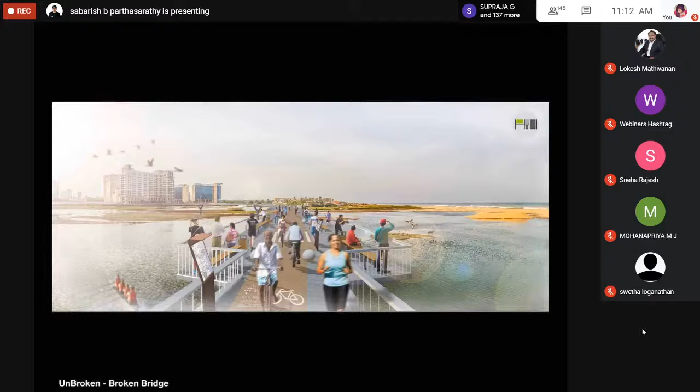And the same spot with the night view.

This is again the super specialty hospital and its public plaza, for what it was intended to be a public plaza, but I don't think it's serving that purpose yet. So what it could be - we were just trying simple notions, making those staircases seatable, connecting a simple bridge, and having the public plaza host a central area of commercial use or any format to activate the space. That was our only intention.

Chennai itself lacks a lot of urban spaces in comparison to other cities. Moving on, and definitely yes, we got a lot of media attention.

So this was just a thought process of what these spaces could be, and what if we accelerate this whole thought process into the future - picking up images and thinking what could it be. That was the whole idea - accelerate it through time, let's say travel 30 to 40 years across.

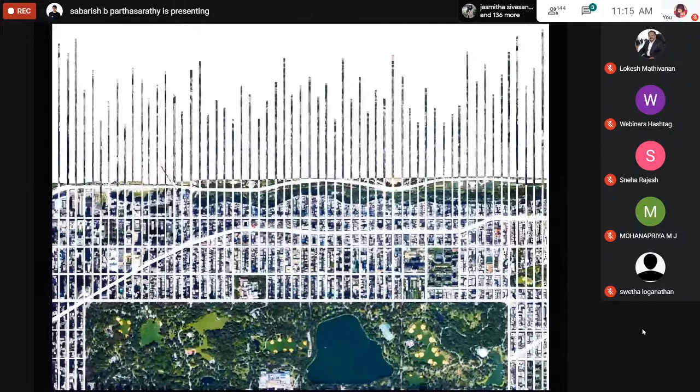And Manhattan, being a completely gridded city, has a complete gridlocked pattern. So zooming in a little into scale - what if these city blocks, what would they convert to be? A capitalistic notion, a city like New York - how would they react? Will they build buildings on the streets, or organically connect them with green spaces? We were just testing images, a short exercise of seeing what these city blocks could turn out to be.

This is another part of the city block. This image is at Central Park - the bottom corner is the entrance to the park, and the top is a complete billionaire row area. What if billionaire row builds buildings onto the streets, and the park explodes and rolls out into the streets as well? What could be the reaction to this kind of scenario?

This is one of the streets in Soho. The history behind the street is that a canal originally ran through it, and they had to bury the canal - it's no longer there. What if we reopen the canal and have a nice urban spot in the city?

Then coming to Times Square, a very heavily populated area - what if that also has a built reaction to it? Most of you must be familiar with the building morphing I've been doing onto these images, but these are just quick notions to test and see what the reactions could be.

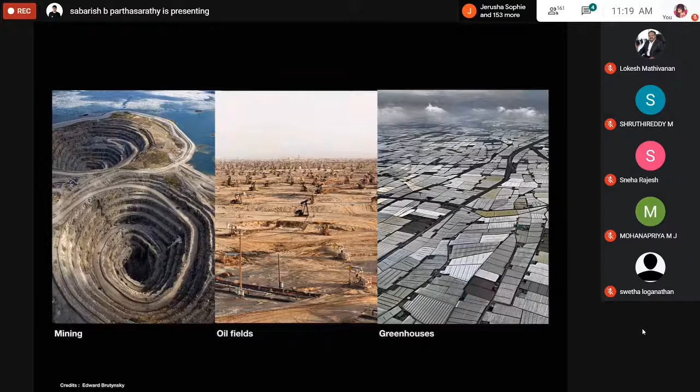We mine so much area on the Earth's surface. There is so much explosion of oil fields. And on the right-hand side, you're seeing greenhouses, complete plastic wrapped greenhouse structures in Spain, and salt pans. The left image is from Utah and the right image from Rann of Kutch, India. So how infrastructure changes the whole face of the earth, like how there's been poisoning of water bodies from chemical industries, or the Pallikaranai marshland, for example, such a large area just because of human intervention, completely changed into something else. On a very larger scale, not just Pallikaranai marshland, but something on a very larger scale. So that is what Anthropocene is.

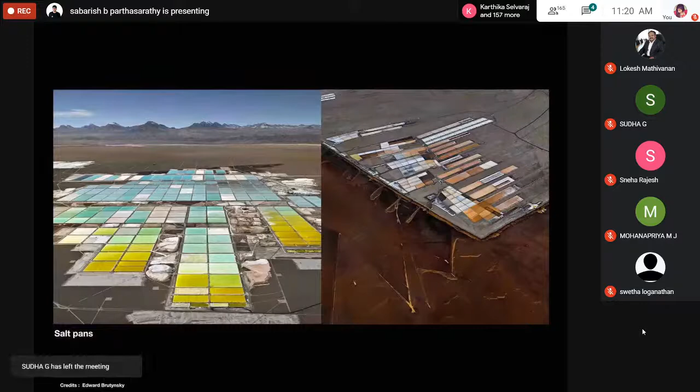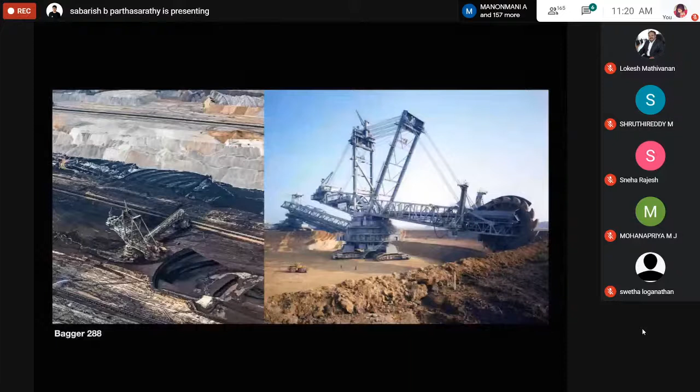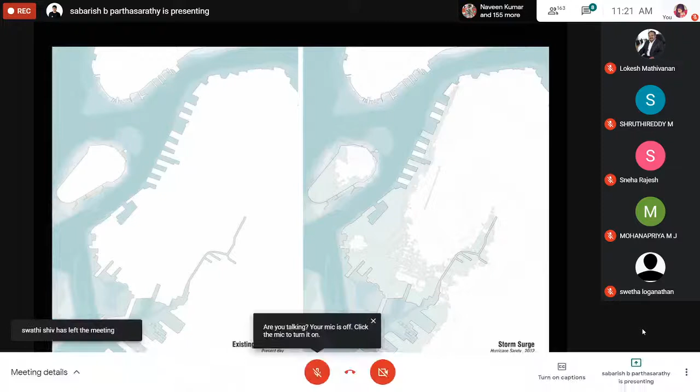So the existing coastline on the left is what it is now, but during Hurricane Sandy, there was a storm surge, and a very big portion of Brooklyn was completely flooded. This was 10 times larger than the Chennai floods in comparison, because this is one of the largest floods even New York has seen so far in history. This completely halted the whole system of infrastructure, from electricity to transit to everything. It was completely devastated, and it took a lot of time for them to recover from this.

So the small canal you're seeing is called the Gowanus Canal, and then the complete portion that is submerged, I'm talking about the right image, the Gowanus Canal, and the submerged portion is Red Hook. So what if, relating to our Anthropocenic scenario, what if this area becomes an unlivable condition for the future? I'm already setting the scenario probably, say, 70 years from now, or 80 years from now. So what could be the usability of this land? What could we do with this land?

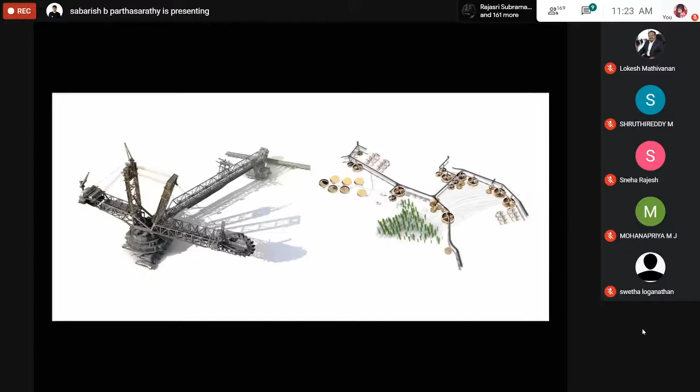So what if infrastructure comes into play into the city, which plugs in with part of the city? So what we did is I picked up the Bagger 288, and what you're seeing, a graphical image on the right, is algae farms. So the landform degrades, and it becomes more like a marshy land area, and Red Hook sort of just goes under the water, let's say. So how these infrastructures could amorphically change the landscape of that area.

And what if the other side, the Gowanus Canal part of it, becomes this acidic landscape of algae, and how those algae could be converted into biofuel. It's a simple infrastructure which sort of just scaled up in a large area. So these are more images of the model.

The green pipes that you're seeing are algae towers that converted into biofuel. As an objectified sense, we were looking at this proposal more at an artistic and aesthetical level. We were just coming up with a simple idea of a model and a few images along with it, how it could look.

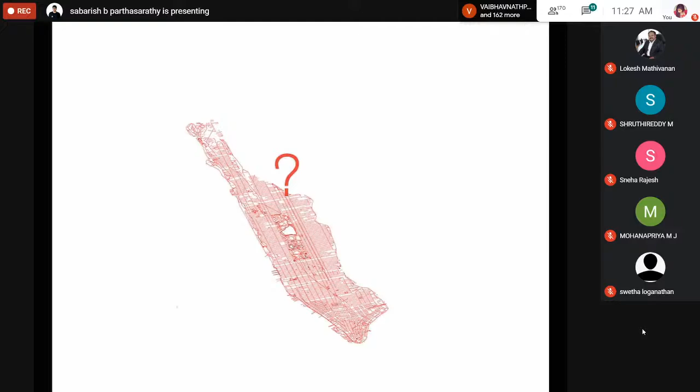So what could be- we have a new blank canvas, and what could the space be used for? Let's just stay there at the moment.

America, in its own culture, shopping or these big box shopping centers have always been part of their culture. Any store for that matter, apart from very small scale retail- of course those are there all through Manhattan- but a majority of users sort of divert towards these big box stores. In a lot of sense, people from a low income group to middle income group, anybody directs towards these big box stores, and these big box stores have been the key drivers of the shopping industry.

This is an infrastructural piece. Something of this scale should really be treated as infrastructure, where a group of these big box stores sort of become malls, and those are the malls that they call themselves big. For them, malls are not on a human scale, in my opinion.

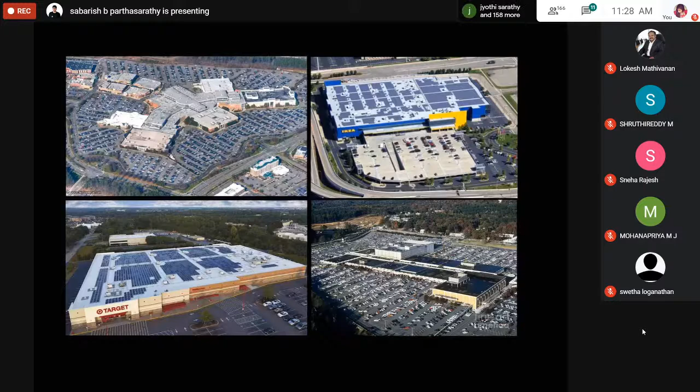Our premise was: what would these malls function like? How would people access these malls when we take the cars off the street? Because the majority of malls are located outside Manhattan Island, so how would people access this? What if we just push this question forward and see what kind of solutions we would find?

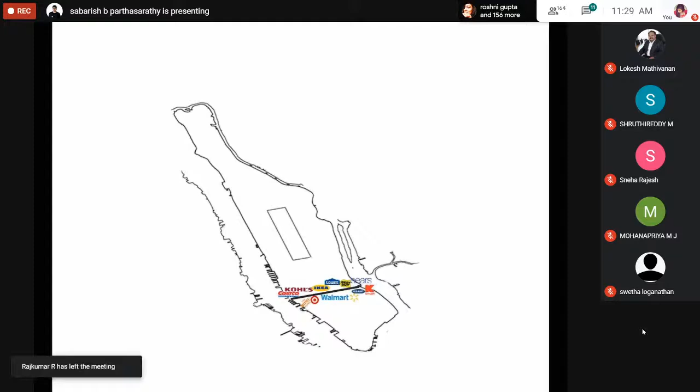So I picked up a street around a residential area, and what if we just bring all these stores into the street, and how would people use the building? What I was looking at is a crazy idea, but definitely could be possible considering the current times we are living in.

So in the future, what if we just drop a 3-kilometer long building, which is 7 meters in width, in the middle of the street, and how this could function as these big box stores for the residential area around?

What we're going to see right now is, as I told you, on the longer direction they split into avenues. We're just going to cut sections across each avenue and see what could be the aesthetical quality, and how the building reacts with the urban connection to the street.

In the first avenue, as I told you, what if it's flooded at the bottom, and this is how the perspective could be.

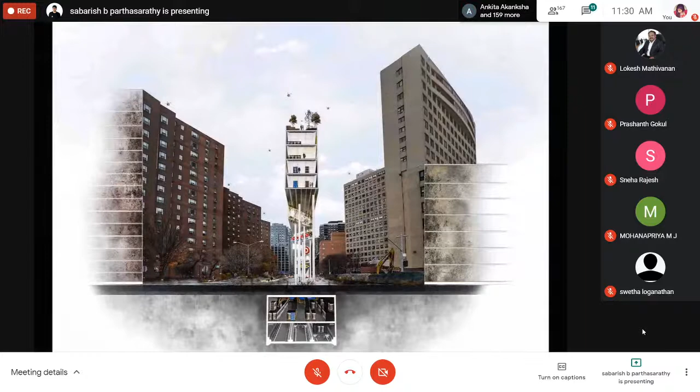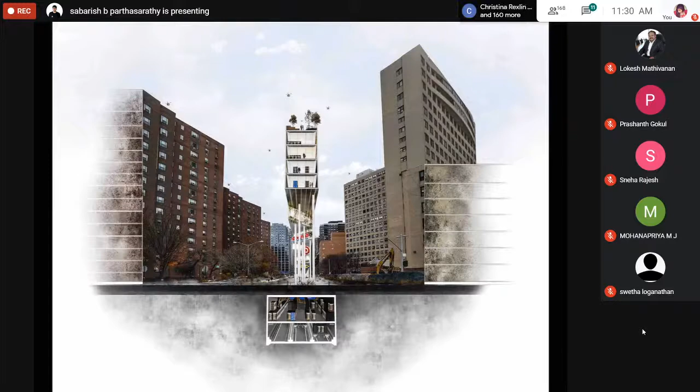To logically aid the building, we actually have a robotic transport system at the bottom that connects to the other parts of the city. Across the island, there are rivers on both sides, and it connects to the rest of the city underground, which could be the feeder of goods into the whole building. These are robotically managed and sent to the retail space above. This image shows how the building could logically be a functional piece between the street while creating more urban space on the sides.

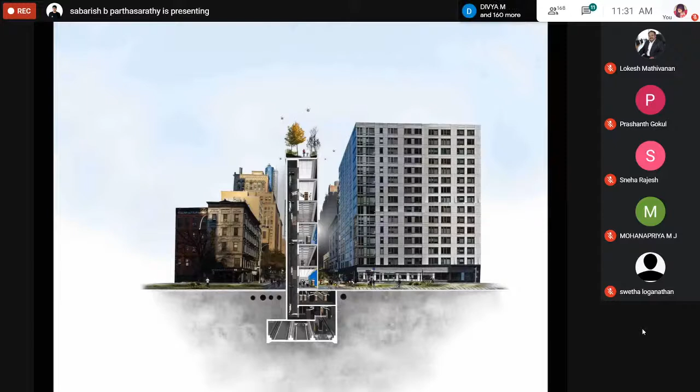What if the building carves and opens itself for the art district to flood into the space, and that becomes an attractive space by itself.

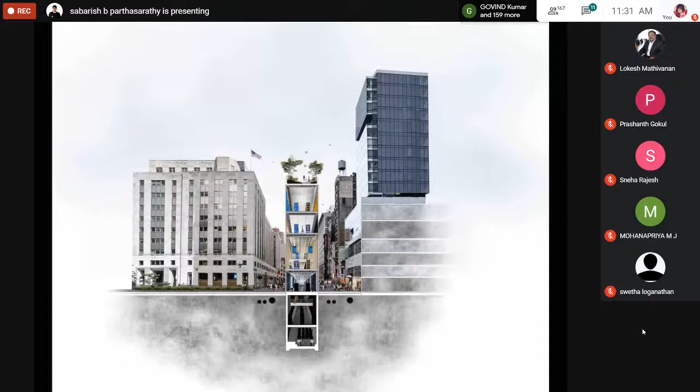What if in this part of the building you see the linear quality, where you're directed in a certain way, the store layout is scaled to a different format, and how you access these buildings is a complete linear environment. What kind of environment it could be. This is another location where it connects the metro and the entry scenario, and what could be.

Apart from this, to add more greenery interest, we put up a park on top of the building as well. What if the Highline, the existing urban top line of the street, a railway infrastructure converted into an urban park, folds between the building itself and connects to the top part. These are just scenarios of what could be, and how would it blend with the city, the street level fabric, and what kind of aesthetical quality it could achieve, is what the question was.

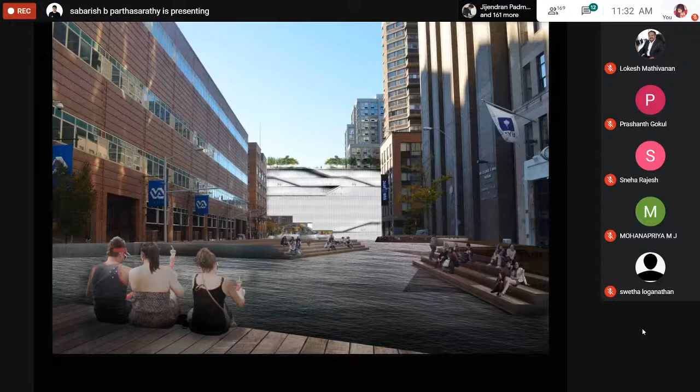Again, as I told you, now we're looking at perpendicular sections of the street. So we saw through the avenues, and now we're looking perpendicular to the street, the flooded kind of scenario.

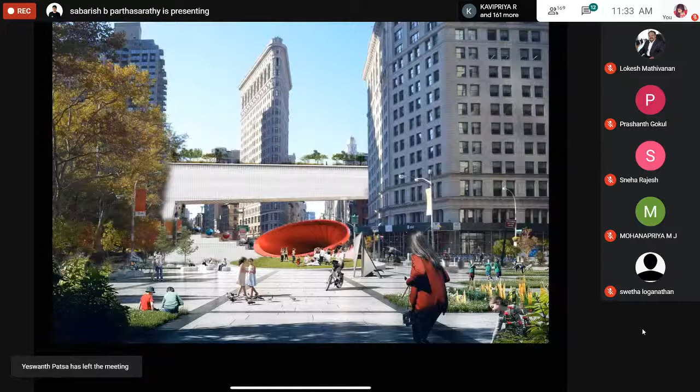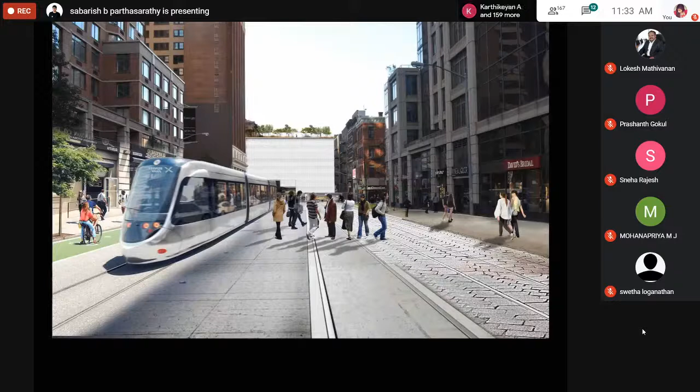What if in a more of a shopping kind of scenario with light rail and connectivity, what kind of aesthetics it could be? In a very residential neighborhood, how it could be a publicly activated space.

These were just thought processes of what if this kind of scenario. It could be anything, but we were trying to see what kind of aesthetics it would create, and what it could do to kickstart conversations of what things could be like in the future. Because right now, I think everybody would agree with me on this. We really need to be prepared for our future and accept any kind of situation, and how do we react to it. That's the thought process we always strive for.

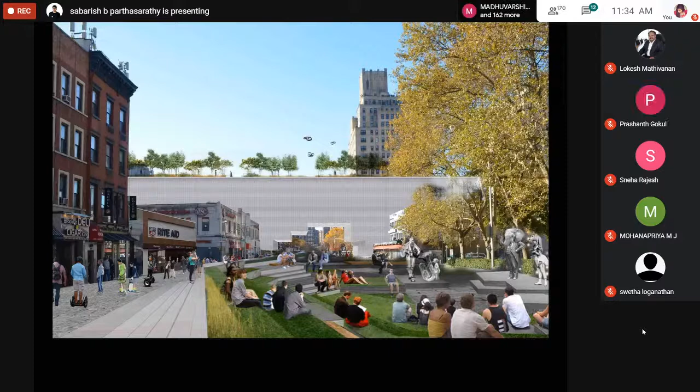This is just a pan image of different sections of the avenues. You see how the building connects itself.

This is another project where we're talking about data centers. A lot of technological companies are now moving towards hosting their data centers underwater to cool the unit, because they require so much electricity and space and a cooling mechanism, and it needs a lot of infrastructure. So we thought, what if we could design this for the future? What would it look like, and what kind of aesthetical quality will it create, and how will the urban interaction be?

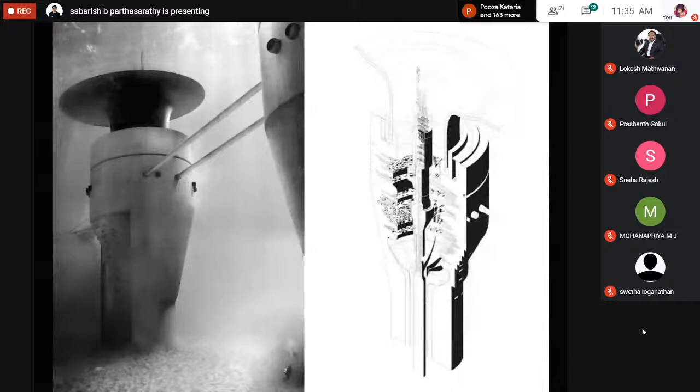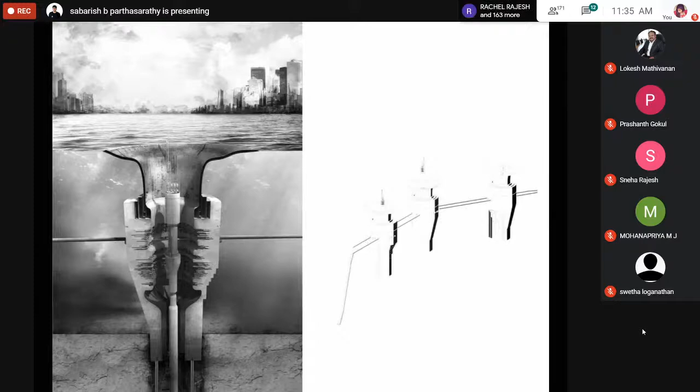We again picked up New York as a scenario, and considered what the underwater quality would be. This is a cross section where you see a spillover space for water that diverts itself out again, and then there's the data structure below. These are all data cells, and the water beside it helps cool it. The central connection pipe you're seeing could be a floating tunnel that passes through it, which gives you this kind of interior quality into the space.

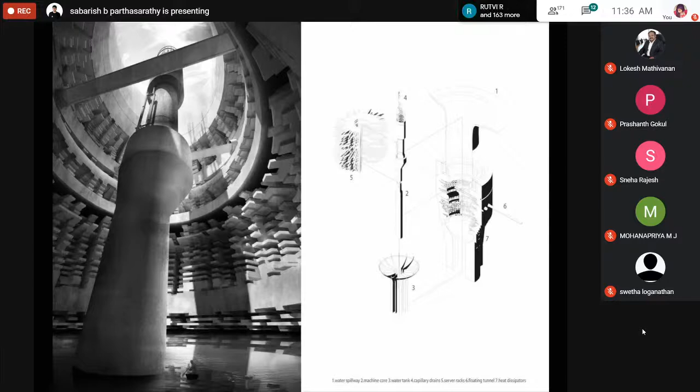So we were just trying to see how we could design for the future, like what kind of interesting aesthetics we could create in terms of how the infrastructure could be for the future. Everybody would agree that interest towards drones has started to grow multifold, not just for domestic use but also for delivery purposes and in a lot of other ways. These two ideas have picked up a lot of momentum in terms of making it real, and it's coming very soon.

But how do we prepare for the future? There's obviously going to be a lot of drone traffic, so how do we react to this? We created a manual that would have a zoning restriction in terms of height. There are already countries and cities doing that, but we did this for a specific purpose that we'd see in the later part of the presentation - at what heights and speeds it could travel, and what these goods carrier drones could do.

So this proposal - what we were trying to see is how we could use the existing metro infrastructure, where they could have these ultra-speed goods carrier devices that would travel within the city connecting different parts of it. We could just have a few drone towers in certain blocks and neighborhoods and areas where the goods could be fed into the tower, and then from the tower the drone picks it up and delivers to the micro fabric. That's how we envision this.

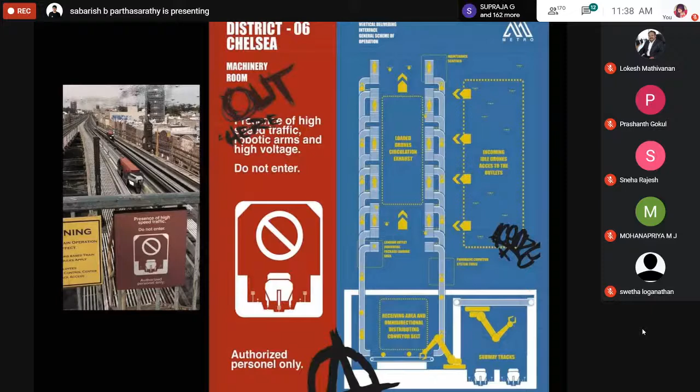The image and the poster you're seeing have a graphic look to show what it would be, a proof from the future kind of situation. These were just images we created to show what it would look like in real life as a manufacturing device itself. This was also a very key thing during our presentations in our master program.

One more thing that was key during our presentations was not just to create renders for the project or how it would look. We always did imageries asking what if this image could be part of somebody's Instagram feed, or what would be the human's reaction to it? This building sort of lives in the background, and what would that kind of future be like? That was very key for us.